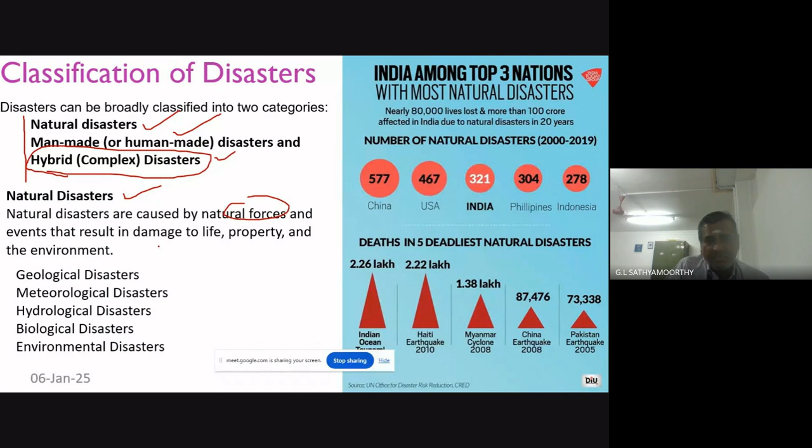Coming to natural disasters, which are caused by natural forces and events resulting in damage to life, property, and the environment, it can be classified into five types: geological disorders, meteorological disorders, hydrological disorders, biological disorders - of course, recently we faced that - and environmental disorders.

One survey says that India is among the top three nations with the most natural disasters, with nearly 80,000 lives lost and more than 100 crore affected in India due to natural disasters in 20 years. This figure is so alarming - India faced almost 321 disasters during the period from 2000 to 2019. This shows the death rates in the five deadliest natural disasters, showing how vulnerable we are when a disaster happens.

Coming to geological disasters, we know earthquake, which is the sudden shaking of the ground caused by the movement of tectonic plates. Then volcanic eruption, the eruption of molten lava, ash, and gases from a volcano. Sometimes landslide - recently we witnessed the Wayanad landslide, the downward movement of rock, soil, and debris due to gravity, often triggered by heavy rainfall or earthquake. Tsunamis - our response is mentioned in the year 2004 when we witnessed one, and Kumaraguru was also part of the combating activities. These are oceanic waves generated by underwater earthquakes or volcanic eruptions that can flood coastal areas.

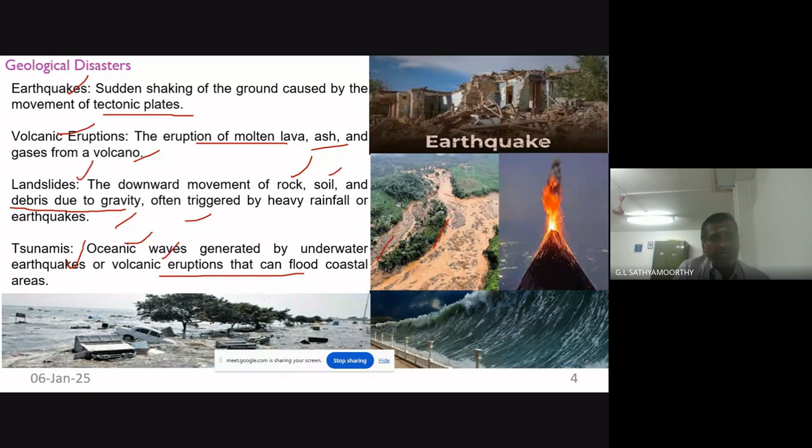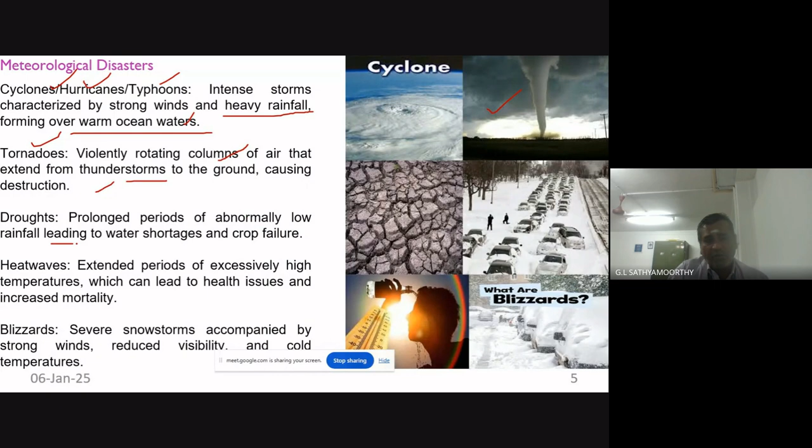These are all pictures showing natural earthquakes, especially from geological disorders. Coming to meteorological disorders - cyclone, floods, hurricane, typhoon all come under meteorological disorder because of strong winds and heavy rainfall, maybe over ocean waters. That is meteorology. Again, tornadoes are violently rotating columns of air that can extend from thunderstorm to ground, causing destruction. And droughts are prolonged periods of abnormally low rainfall leading to water shortages and crop failure.

Nowadays we are not facing the drought, but we are facing heavy downpour and heavy drought. Both are happening in our area because of climate change, as rightly told by our principal. Again, heat waves, extended periods of excessively high temperature, which can lead to health issues and maybe increased mortality.

Again, blizzards, severe snowstorms. Of course we are in Ooty and all, we can see in recent news that Urai Pani is possible in Ooty. Like that, some areas of North India are facing this type of blizzards because of snowstorms, which will cause reduced visibility and cold temperature. Because of that, people will suffer. Sometimes this type of thing may happen in disasters, especially meteorological disasters.

Coming on to hydrological disasters, the floods, which usually happen when rivers overflow during the rainy season, normally on dry land. Of course we are facing issues in the Tanjore districts and recently we faced it even in Tirunelveli, caused by heavy rainfall, again snowmelt. Of course this is not in South India, this could be in North India. Sometimes dam failure or dam opening, deliberate dam opening, all of which we recently witnessed.

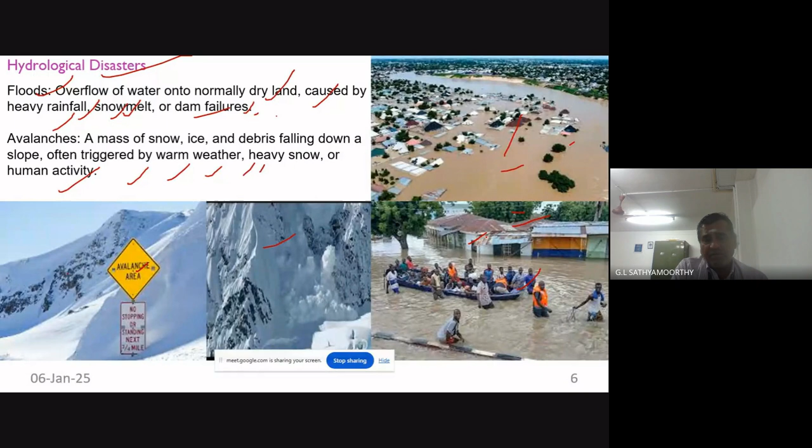Again, avalanches, a mass of snow or ice debris falling down a slope, often triggered by warm weather, heavy snow, or human activity. Sometimes those who are climbing snow mountains face this type of problem while climbing. These are all disasters, these pictures showing the ill effects of floods whenever dams are opened without giving notice or warning. Again, coming on to biological disasters, of course recently we faced the pandemic, and pandemics and plagues, widespread outbreaks of infectious disease.

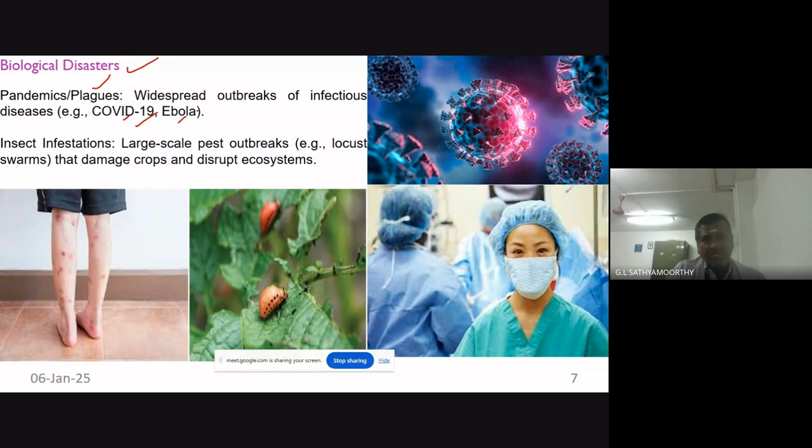Again, COVID-19, Ebola disease. We were almost 2.5 years in lockdown because of the pandemic. Again, sometimes insect infestations, sometimes insect bites, which may cause outbreaks of diseases, maybe among humans, this type of disease may come for humans.

Sometimes it may go and eat the leaf or the crop. In such a way this will also damage crops and disturb the ecosystem. We all know that we had our personal protective equipment and then we moved during the time of Corona. This is one of the biological disasters we recently witnessed.

Again, coming on to environmental disasters. Naturally many environmental disasters are happening around the world, especially forest fires, which cannot be controlled, which will spread across all the vegetation, often caused by dry conditions. Whenever two wooden blocks have friction, sometimes this type of wildfire will pop up. Again, sometimes lightning also will contribute to that.

Sometimes human activity, in the Amazon, of course, they are planning roads near the Amazon jungle. Because of that, sometimes people going there use fire-like things for the benefit of cooking and all. In that leap, sometimes this type of human activity causes environmental disaster to pop up.

Again, coming on to pollution, we deliberately pollute air, water, and soil. Because of that, many contaminations are happening. Because of the contaminations, we become the host in spreading diseases. That is what is happening in environmental disasters. So that is why it is our bounden duty to say that we have to not pollute air, water, and soil.

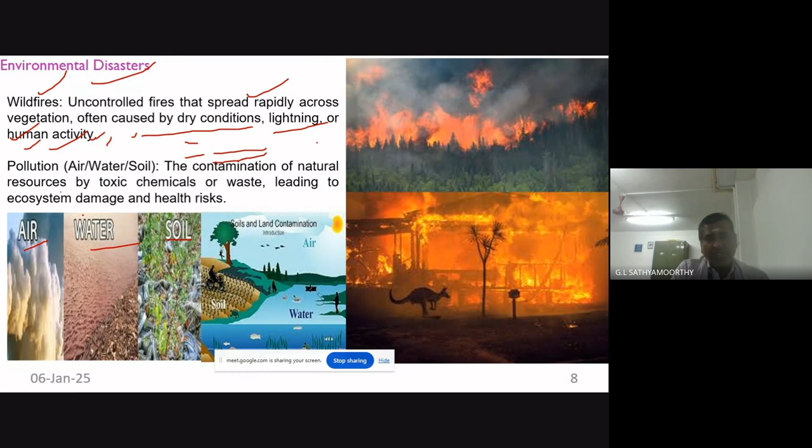Again, coming on to various man-made disasters, which are caused by human actions or negligence. Sometimes negligence also, often involving the release of harmful substances, maybe into the air, or destruction of infrastructure. So again, this can be grouped into 5.

Number 1, technological disasters, environmental degradation. Third one, armed conflict and war. You see nowadays Russia is making attacks on Ukraine's power grid, which may lead to catastrophic nuclear accidents. Again, technological failures, which is one of the, maybe power line failures, all those.

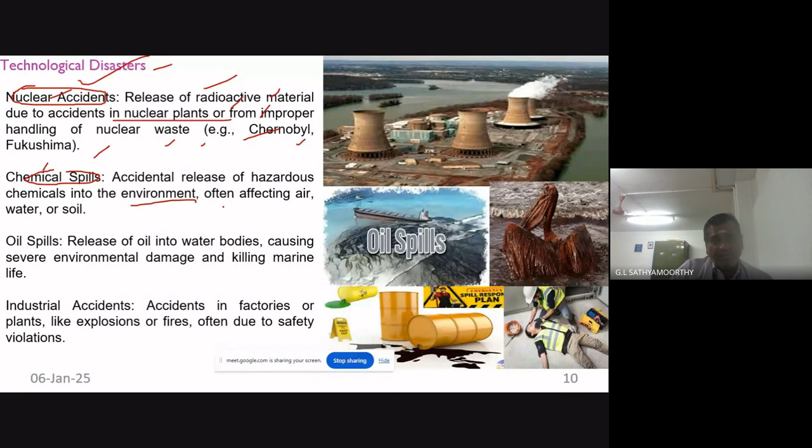Again, chemical spills. Recently in Andhra Pradesh we have seen some chemical spills - accidental release of hazardous chemicals into the environment, affecting air, water, and soil.

Again, oil spills - we recently witnessed this in Tamil Nadu coastal areas, especially near Chennai. Release of oil into water bodies. When oil ships face problems in the sea, oil spills may happen, causing severe environmental damage, including killing of marine life. You see this species living in the oil-linked area.

Again, industrial accidents - sudden accidents in factories or plants, like explosions or fires, are often due to safety violations. Sometimes accidents happen because of negligence of people in industry. These are all called technological disasters, especially man-made disasters.

Coming to environmental degradation - deforestation is one of the serious issues caused by people. Even in the Amazon, people are building roads through the forest. That's why nowadays we are encouraging afforestation programs - if one tree is removed, ten saplings must be planted, supporting afforestation and avoiding deforestation.

Again, soil erosion - this is topsoil removal happening because of leaching out during rain. Sometimes this makes land less productive and vulnerable to floods. All these are happening because of man-made actions.

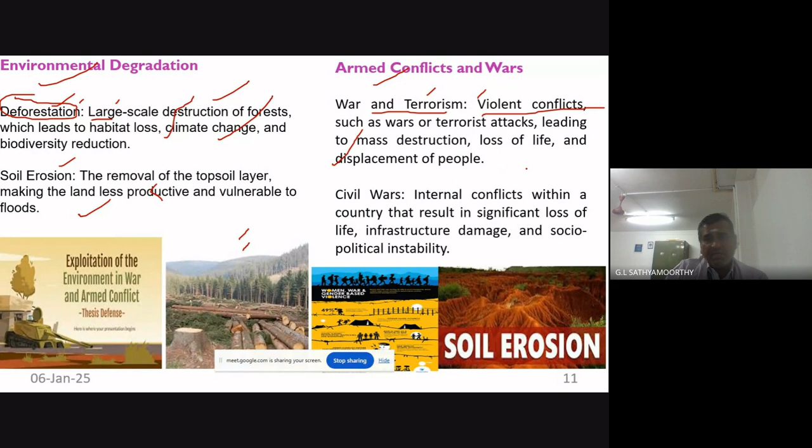Again, armed conflict and wars - war and terrorism, because many wars are happening around the world, violent conflicts such as war and terrorist attacks lead to mass destruction, loss of life, and displacement of people. You see, whenever Bangladesh has some problem, we face some sort of problem in the neighboring states and districts.

People say sometimes migration from Bangladesh to India happens because the borders are very close by. Similarly, whenever Burma is under problem, people migrate to India. Likewise, with war and terrorism, we see many Tamil Eelam people coming from Sri Lanka, maybe to India. This not only causes internal strife but puts nearby countries under stress too.

Again, civil wars, especially internal conflicts - we know Somalia, which is facing severe drought and economic crisis because of internal conflict. Nowadays gender-based violence is also a problem - you see women facing war-like conditions. These things are also created, causing destruction because of man-made actions.

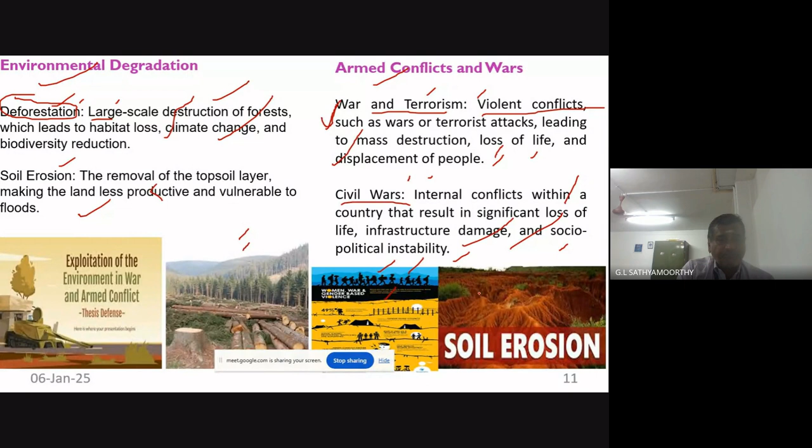Again, cybercrimes are increasing nowadays. Even the Government of India, before we make a phone call, gives awareness messages - don't be a victim of cybercrime. People are nowadays talking about 'digital arrest' - there is no such arrest available in India, but people talk about digital arrest and put victims inside a room by telling them this. We have to know and avoid all these things.

Again, you see nowadays - earlier knowledge was power, now data is power. Whenever data gets leaked to a nearby organization, we as an organization suffer. That is very important. Important data should be protected - that is why nowadays computer engineers come up with coding languages.

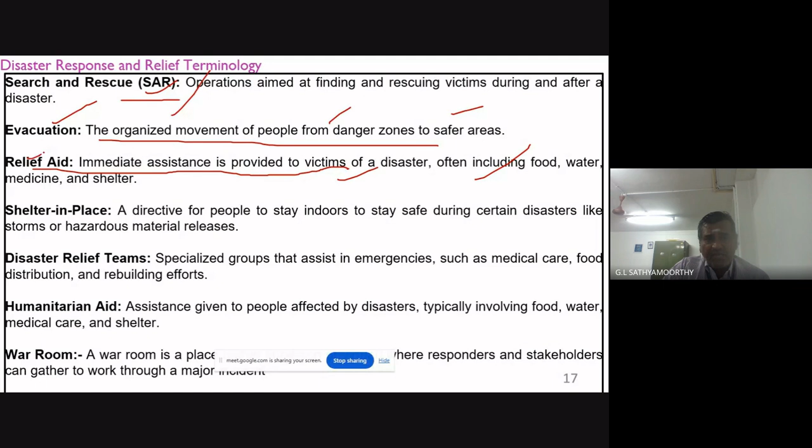At that time, money alone will not suffice, because even when Tirunelveli was affected, people were asking for drinking water, since water was available everywhere but not good for drinking. That is why we arranged bottled water.

Again, shelter is very important, because when everything is lost, people need to be put up in a nice place. Shelter in place is a directive for people to stay indoors and stay safe during disaster, because their morale will be completely lost, as they lost their life, their near and dear ones, and also their finances. At that time, they must be kept at the highest morale. That is very important.

Again, disaster relief team, a specialized group, is very important. This specialized group can move into the disaster area and provide support, including medical care, food distribution, and all those things.

Again, humanitarian aid is assistance given to people affected by disaster, typically involving food, water, medical care, and all those things.

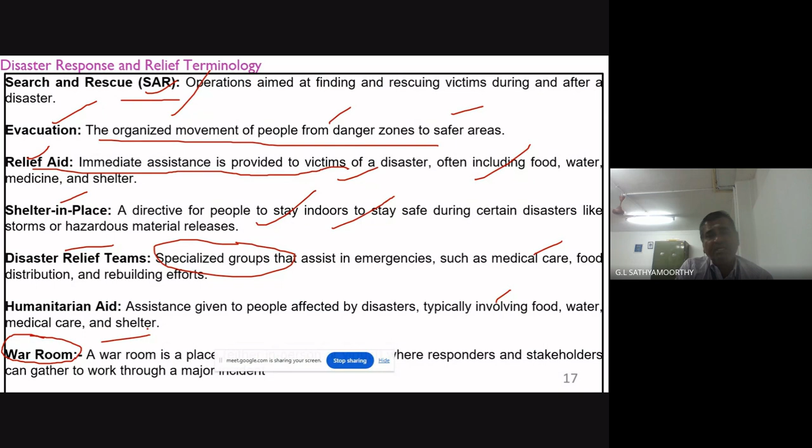War room, that is very important. A war room is a place where decisions are taken. Even during the pandemic, we established a war room in our state capital. Whenever disasters happen, the war room plays a major role, where people can give and get communication and information. High command, along with officials, can sit and take the right decision in order to mitigate the disaster. That is what the war room does.

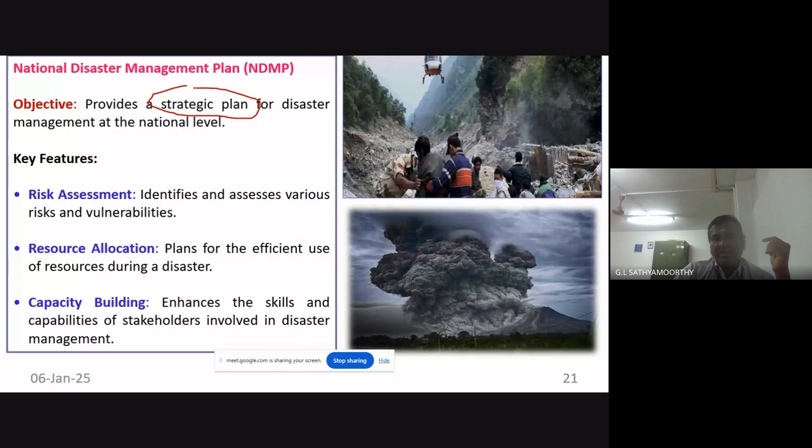Again, the National Disaster Management Plan, NDMP, is a strategic plan. Whenever something happens—a fire outbreak, a flood at the national level—it gives the framework for what all things need to be done: risk assessment, identifying and assessing the various risks and vulnerabilities. Nowadays whenever we hear about a flood, we can understand what sort of problem may happen.

Again, resource allocation—plans for efficient use of resources during disaster. Especially during disasters, people face issues with drinking water, food, shelter; all this has to be properly managed. That is why it gives a comprehensive plan for how to utilize resources.

Again, capacity building—during a disaster many people join hands, but they may not be trained. That is why we need regular trained people to enhance the skills and capability of stakeholders involved. That is why there are state teams and district teams available for immediate response.

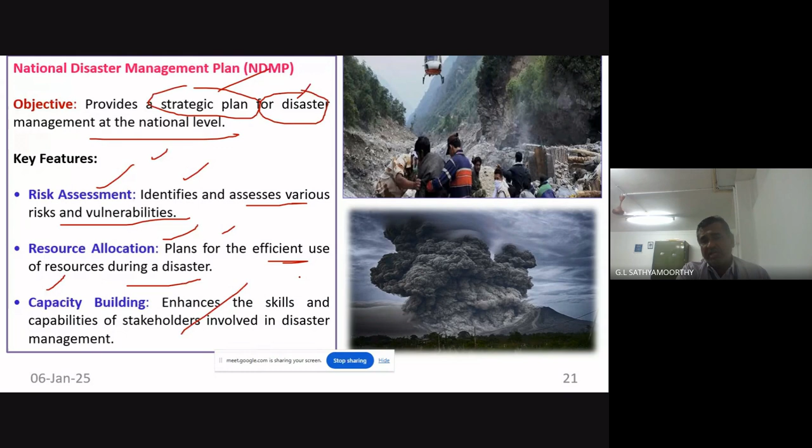Even in our institutions, through NSS volunteers, whenever there is a requirement to support this type of natural or man-made disaster, many students are ready. They are given training and then taken to the real ground for their activity. In such a way, we can combat or mitigate some of the disasters.

Again, coming to the Environment Protection Act, which talks about the legal framework on environmental conservation, especially supporting disaster risk reduction. Pollution control—regulations to prevent pollution which can mitigate certain types of disaster.

Example, air quality standards—Delhi is under severe problems. Nowadays many cities are under problems because of smog, thunder, storms, or cold climate. Whenever air quality standards go beyond limits in Delhi, we find the index, which is supposed to be 50, reaching 300. That is why it's highly vulnerable.

Like that, by means of having certain indications, you can avoid certain problems by imposing strict regulations. That is why water quality regulation for drinking water—all these standards need to be there.

Then it can be bottled and sold. Like that, some regulations exist - again, waste management rules. How do we do the waste management? How do we do composting? All those things are available. Government of India is supporting that.

Again, chemical safety regulations - how nuclear waste can be transported, how it can be stored, all those things are given. Again, water and noise pollution is also sometimes going to be havoc, especially in urban areas. For that also we have the pollution control board regulations to mitigate.

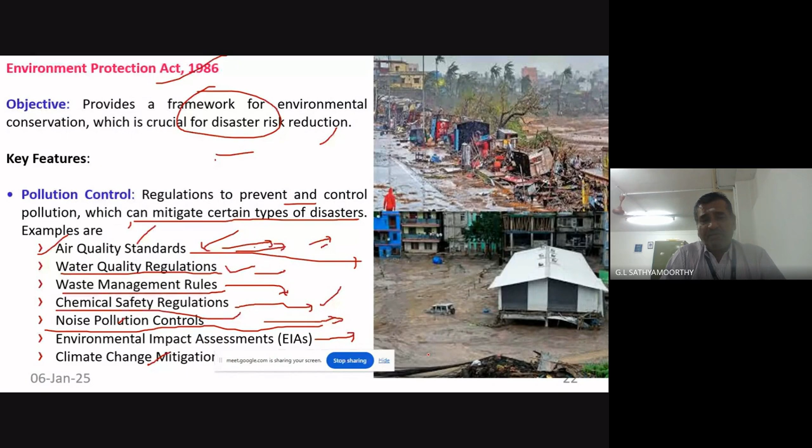In Madras nowadays, we can see people obviously putting their cars in the sides of high-rise bridges. The idea is they understand where the water may come and damage their vehicle. That is why they prepare themselves and stay in line without affecting the regular traffic - they are parking their vehicles on high-rise bridges.

Like that, we can do risk mapping, and then we can identify vulnerable areas so that we can evacuate people, and we can also save some economic loss from that.

Again, preparedness plans - whenever more people are getting affected, we can prepare some strategies, and then we can make people comfortably evacuate from that area and arrange food, shelter, everything for them. That is called a preparedness plan.

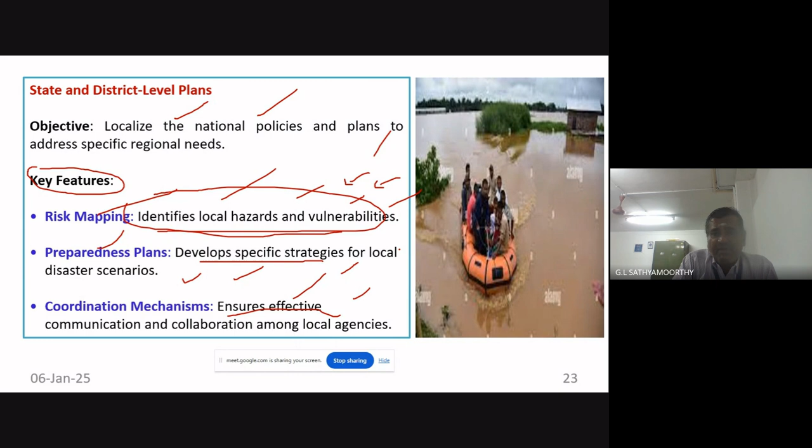Again, building construction code - we should not violate the NBC norms. That is what our director touched upon in his address, the importance of constructing high quality buildings, high quality resilient structures.

That is very important, because whenever we compromise on building standards, we are definitely going to invite danger. That is why the seismic, wind, all those things we have to take into consideration. We have to go for it.

Again, compliance - sometimes regular inspection and enforcement. You see, in Coimbatore, many buildings which are not worthwhile to live for human beings are destructed, and then we construct new buildings for them. Especially in Ukkadam area, we have seen one building that went down into the soil.

So what we did, sir - immediately we said that those areas are not suitable for people to live, and we evacuated them, and then we constructed new buildings in the area near Kurumbapalayam and other Saravanampatti area. Of course, people were evacuated.

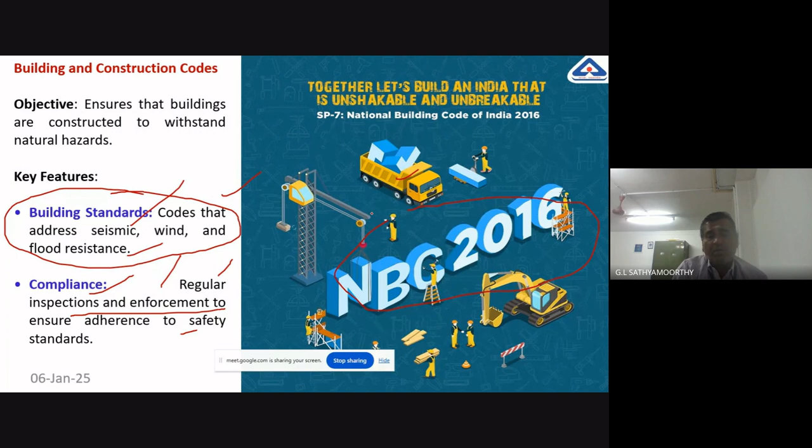Regular inspection and enforcement - so many slum clearance board buildings are not suitable for living. Now they constructed new buildings for the benefit of slum clearance, slum dwelling people. Now they evacuated. Like that, we can do.

Again, coming on to how this can be taken to higher education institutions and schools - that is curriculum integration. You see, in all our curriculum, this particular thing is given as one of the important aspects. Maybe in open elective, for masters we are given it as an audit course. Especially everyone should do it.

Without that, they should not go outside. Like that, we can put it into curriculum, and then we can give an insight for students on how best they can technically manage any disaster whenever it happens.

Again, schools need education safety plans. Recently I witnessed a video on social media where an unknown person approaches a student and offers chocolate, and the students vehemently refuse to take it from the unknown person. Like that, passcodes can be introduced for when parents are not coming but somebody else is sent to pick up the children, so students don't go with unknown persons. Some such measures can be done especially in schools, preparing them because school children may be vulnerable to this type of man-made disaster. We can avoid that.

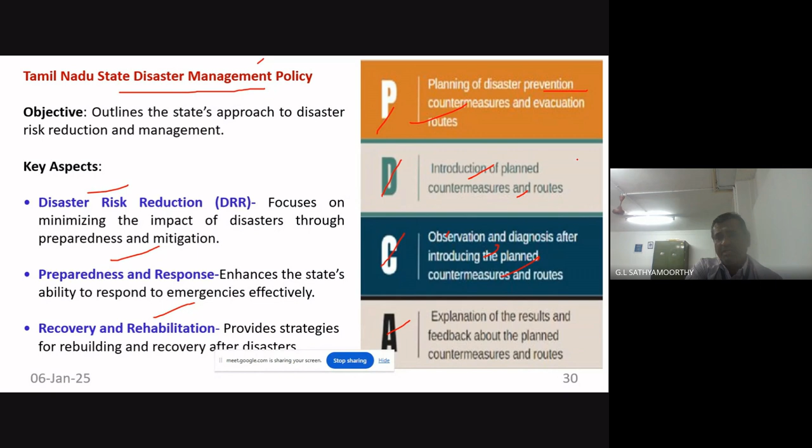Again, Tamil Nadu State Disaster Management Policy includes a War Room. Tamil Nadu nowadays sets up a War Room even for natural or man-made disasters, because they immediately announce emergency telephone lines, hotlines, and war room connections. We witnessed this during the pandemic and for the Chennai floods, where the CM set up a war room.

This provides the detail for managing disasters in the state: risk assessment, identifying risks, preparing the plan, and working with the people. Resource management involves planning what resources are available and sending them accordingly. That is where I personally believe in resource management and coordination.

As rightly told by our correspondent, we can join hands in artificial intelligence and resource management. We can go for supply chain management where excess resources can be taken to needy people. Similarly, coordination can ensure that where more volunteers are available, they can be sent to other areas through supply chain management. All these concepts can be brought in to support people affected by disaster, especially during the time of disaster, when we can join hands.

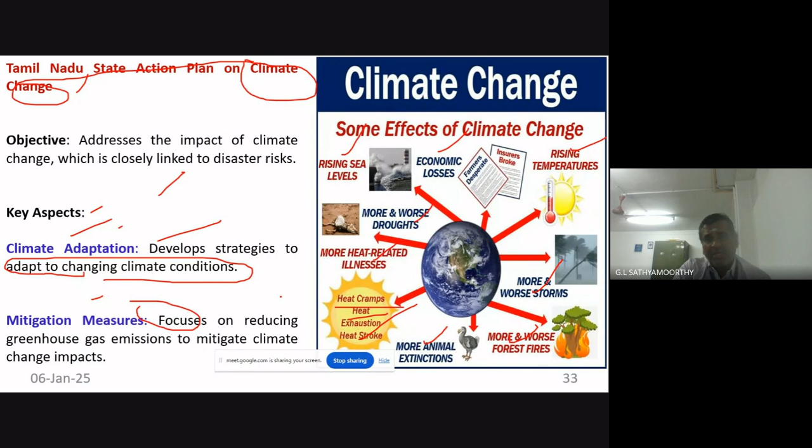Again, in Tamil Nadu state, we have the early warning system, especially for floods. Last time our Chief Minister went to Delhi and requested Amit Shah ji, because the early warning systems were failing. They said a good system should be in place to evacuate people from the affected areas. That is why nowadays the Government of India is pouring money into making early warning systems available in all flood-affected or disaster-affected areas.

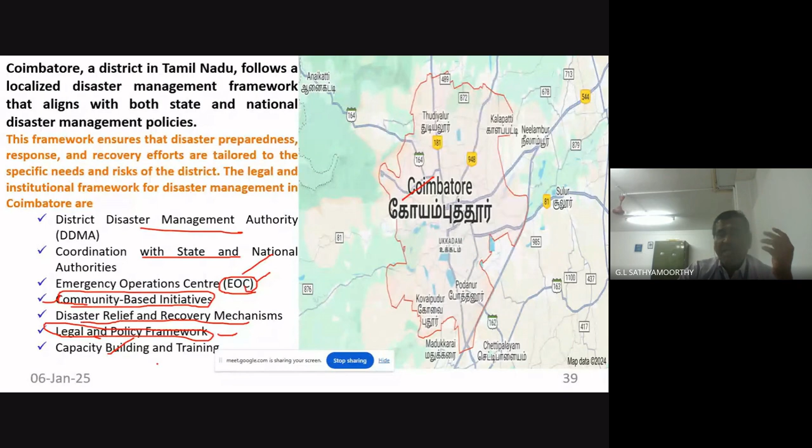We can do some sort of national level thing, again implement at local level, legal and policy framework. Sir, sometimes legal offense should not be there while we are doing the work. Again, capacity building and training - every village, people can be trained to respond to immediate disaster requirements.

All those things, again district disaster management authority - they give the chairperson, maybe the district collector or district magistrate, including senior officials from government and local bodies. Again disaster planning, coordination, all those things they will be doing at district level. That is why I told you this district disaster management is not only by local people, from national level to state level to local level, or district level to state level to national level. Whatever good plans, whatever good strategies are available, that can be taken and we can go for implementation. Even district level plans can be adopted at national level.

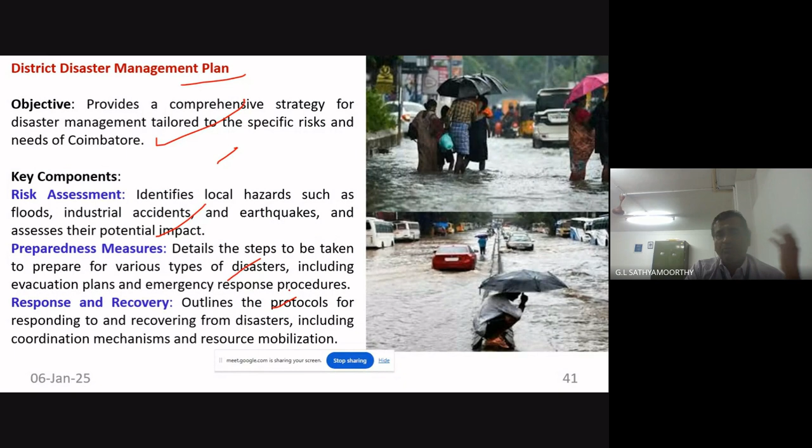Again, a management plan is a comprehensive strategy for disaster management. Especially whenever Coimbatore gets heavy downpour, we tell people they should not go to some of the bridges which are under low-lying areas. Like that, now we have mapped many areas and we are giving awareness to the people. Again preparedness, response, recovery - all those things you can do well in advance, and we can tell the people not to become the victim of it.

Again mock drills are very, very important. Sometimes the state disaster management authority will come and conduct some sort of mock drill. During the time of preparedness, even for fire and safety, the fire safety officials are ready to give training at all the colleges. Just when we pay 1500 rupees for them, they will come and give training during the time of outbreak of fire - how we are not supposed to panic, how do we mitigate those fires. Everything we can get just by paying a 1500 rupee fee for them. One day they will come along with their own force, they will teach us and even give some hands-on training. Like that, we can go for mock drills in our places by creating a team, and then we can go for supporting emergency operations.

Whenever EOC, even mobile centers are nowadays available, which have a radar and everything.

Communication will not disturb because of any other mode of failures. That is very important. It acts as a central hub for managing disaster response efforts, so emergency operations can be immediately done. Even with mobile technology nowadays, we can put the emergency operation centers on wheels, so we can take it anywhere away from the disaster area, make it stand, and then communicate.

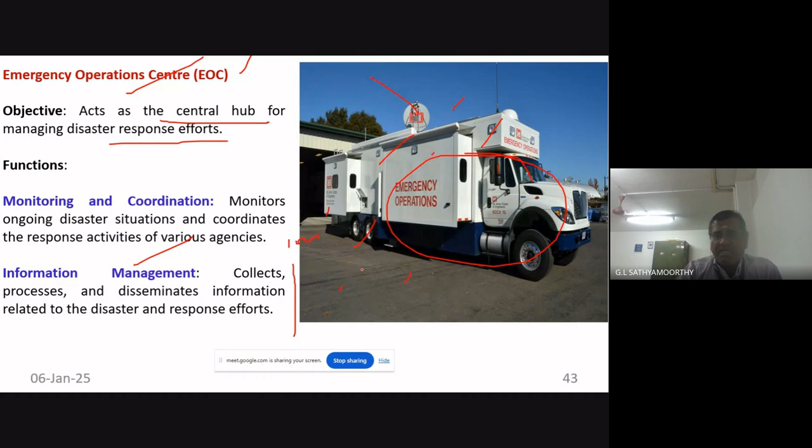Again, this acts as information management. We should be collecting information both ways, from the disaster affected areas as well as other areas, so that they can give guidance. Suppose, for example, 100,000 relief vehicles are coming in, where does it have to go? When we contact the emergency operations centre, they can tell us, please go and distribute over there. Like that, we can manage it.

Again, community-based initiatives, maybe awareness campaigns. We can do plenty of awareness campaigns through structured programs, or informal and formal meetings. Again, training workshops can be given for people on how to act during the time of disaster, for local leaders and everyone. We can create at least 30 volunteers and prepare them for community-based initiatives. We can go for it.

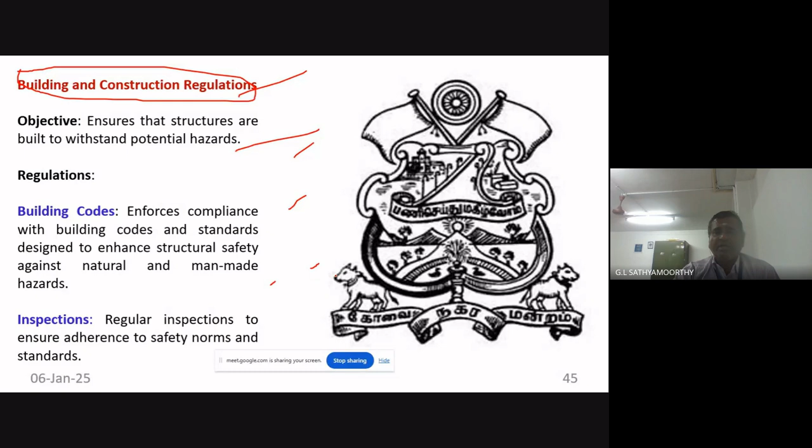Again, building and construction - nowadays these municipal laws are becoming too stringent. Even LPA is becoming too stringent. When we violate the norms, they will not give the initial level approval for any building. When we make it regular for everything, people will not violate. There was a program where Madam Jayalalitha was there - those doing rainwater harvesting structures in their homes would be given a license to construct, or approval by the municipality. Like that, with some ordinance in place, we can see disasters are not happening.

That is why, sometimes, the relief and recovery mechanism - we have to rehabilitate the people by various means. Whenever COVID was there, our Kumaraguru Center was considered as one of the rehabilitation centers, where we gave yoga training, Kabasura Kudineer, and healthy food for the people to recover.

Like that, some sort of help we can do for the benefit of people affected by the disaster, whether small or big, because when disaster happens to other people, it is just news for us. When it happens to us, it is a massacre, or life damaging. That is why I always request everyone - put yourselves in the other man's shoes, and then see how best these types of rehabilitation can be given for the benefit of people who got affected.

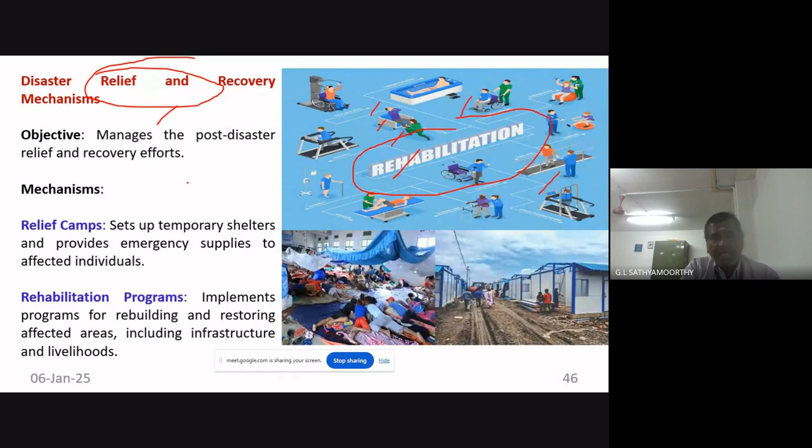When somebody gets affected by a disaster, their morale will be completely lost. They will be in fear, they will be in danger. All those things we have to remove from the minds of people by putting them at ease, and giving them a very good relief and recovery mechanism. That is what is very important.

Again, collaboration of non-governmental organizations and community work is very, very important, because they can join hands. Gandhiji says the best way to find yourself is to lose yourself in the service of others. So whenever we think, even an individual person can think 'I can do something' - that something is great when a disaster is happening. That is what Gandhiji is telling us - immerse ourselves in the benefit of others, in the service of others. That is what Mahatma Gandhi is telling.

This is the fulcrum for any community-based engagement - works with local communities, enhances preparedness. Again, what is the best thing? If I know something about disaster management, please go and tell others and try to be a part of that. That is what Gandhiji says - the best way to find yourself, especially during disaster, is immersing ourselves in the service of others. That is very, very important. That could be physical work, mental work, or distribution work - anything you can do, kindly join hands. That is what is very important.

Again, capacity building measures are very, very important. Without that, we cannot go to the real field and do surveys. That is why workshops and drills should be conducted on a regular basis. Educational programs should include all disaster management topics, and mock drills on disaster management effectiveness can be given. Thereby, we can go forward.

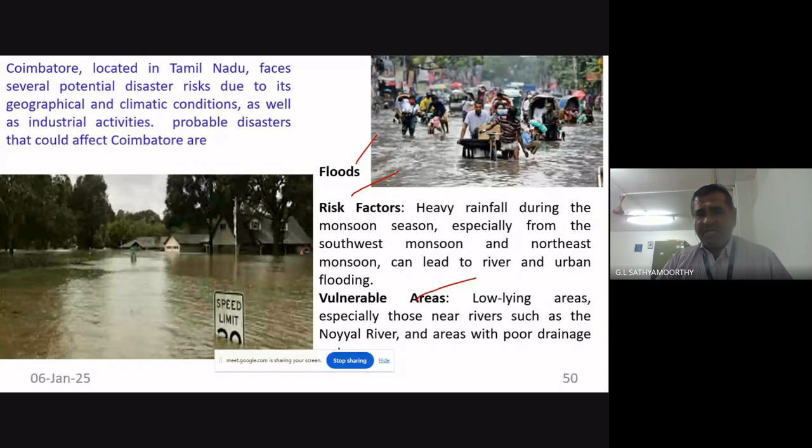Coimbatore is also vulnerable to floods, so low-lying areas are identified and avoided. It is also prone to drought and industrial accidents, since Coimbatore is one of the industrial cities, so we face some threat there too. That is why industrial areas are marked, and agriculture areas prone to drought are marked, and we tell farmers to adopt high or less water-resistant crops.

Coimbatore is also prone to earthquakes, and sometimes specific areas are identified for this. Hope my presentation is visible, madam.

Yes, visible, sir. Sometimes, even though Coimbatore does not directly have any coastal area, we also face problems because of cyclones. In the recent flood, Coimbatore may also get flooded, so we are making ourselves prepared for that.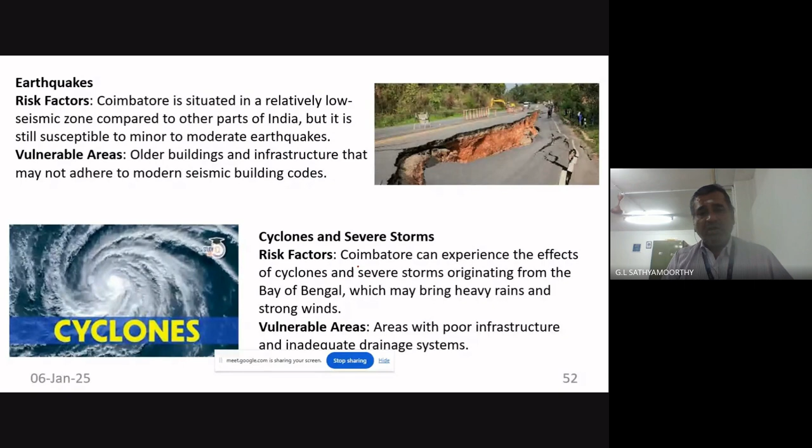Again, heat waves are one of the important things, because during summer, high temperature can lead to heat waves, affecting the health and well-being of Coimbatore people. Even Erode has this type of issue. In urban areas, we have to avoid lack of green spaces and poor ventilation.

Again, urban fires: sometimes high population density can lead to urban fire. Vulnerable areas include slums, densely populated areas, and industrial units. These areas should be marked, and we have to keep certain forces over there to avoid such incidents.

Maybe landslide as well. Some of Coimbatore's mountain district areas are vulnerable to landslides. So we have to go for afforestation programs in soil-eroded areas, or use geotextiles, which can strengthen those areas.

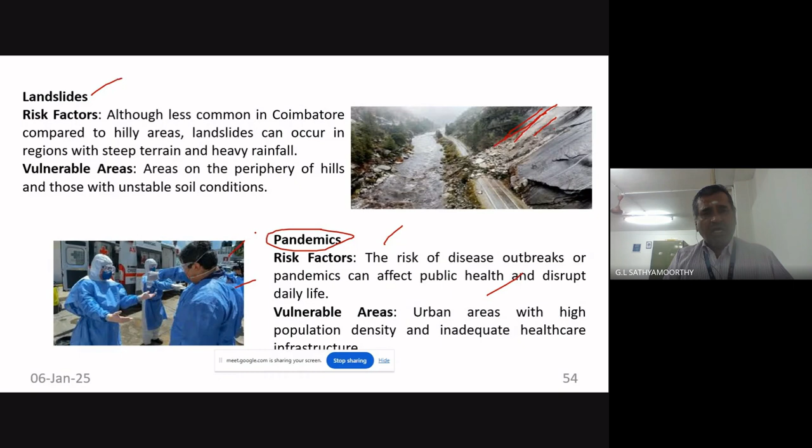Again, we face some sort of problem with pandemics. We have to ensure our medical infrastructure is made in such a way that people should not lose their life due to any communicable diseases.

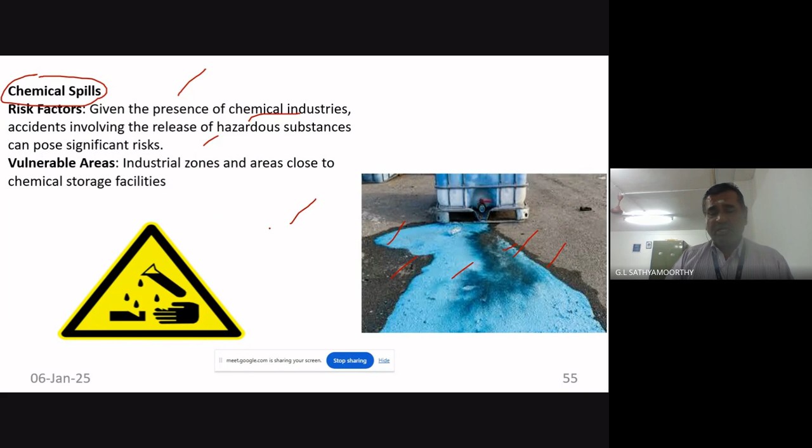Again, chemical spills sometimes may happen in Coimbatore because of industry. Whenever chemical spills happen, the best way to combat it is to use a wet mask and inhale through that, because the wetness will prohibit the movement of the chemical during inhalation. So use or dampen your handkerchief and use it like a mask. That is one of the suggestions given by authorities whenever we face incidents like the Andhra chemical spill.

Again, sir, the Prime Minister of India, Modi ji, has given a 10-point agenda for the benefit of disaster risk reduction, the DRR. He says all development sectors must imbibe this principle, because development should not be the only cause or aim, sir. They should always keep disaster risk as one of their important principles. That is the first point of the 10-point agenda.

Again, risk coverage must include all, so the risk coverage should not avoid small and medium enterprises. Risk means risk to everyone, so that coverage should be given to all.

Again, women's leadership and greater involvement should be central. Recently, one woman major was acknowledged by the Kerala government because within a short time, along with their troops, she made a temporary bridge for movement of people and goods. Like that, women should be made a part of any disaster management or risk management. That is what Modi ji is asking for, the third point. And the fourth one is to invest in risk mapping globally.

That is why risk mapping needs to be done in every area. If a flood comes, if heat waves come, we need to know which areas are getting affected, so we need to have risk mapping. If something happens, those area people need to be evacuated immediately.

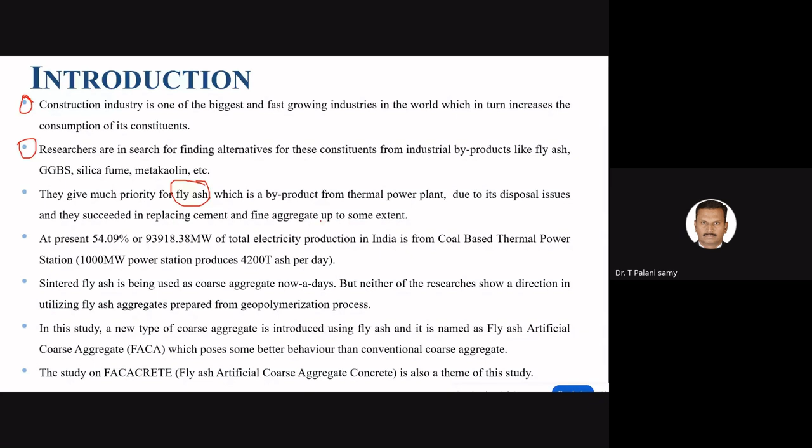Without products like GGBS, silica fume, metakaolin, we cannot achieve this kind of strength of material, and much priority is given to fly ash because it's a very good material—a byproduct from thermal power plants. Due to disposal issues, it is used to replace cement and fine aggregate to some extent. You can replace cement with fly ash, directly or indirectly—even during cement manufacturing, some cement can be replaced by fly ash.

On another side, at present, everyone is talking about energy consumption. The PM also mentioned goals around energy efficiency. For that, at present, 54.09%, or 93,918.38 megawatts, of total electricity production in India comes from coal-based thermal power plants.

Coal-based thermal power station. For example, a 1000 megawatt power station produces 4200 tons of ash per day. This is our power consumption and production. This is produced from industrial waste products, byproducts called fly ash. So this much quantity of ash is produced every day against this much power. That is the scenario, and this is another side issue.

You may ask, sir, why is this older technology, why are you bringing it here now? Correct question. The sintered fly ash is being used as coarse aggregate nowadays - that possibility is there. Sintered fly ash aggregate as a coarse aggregate is another area of research.

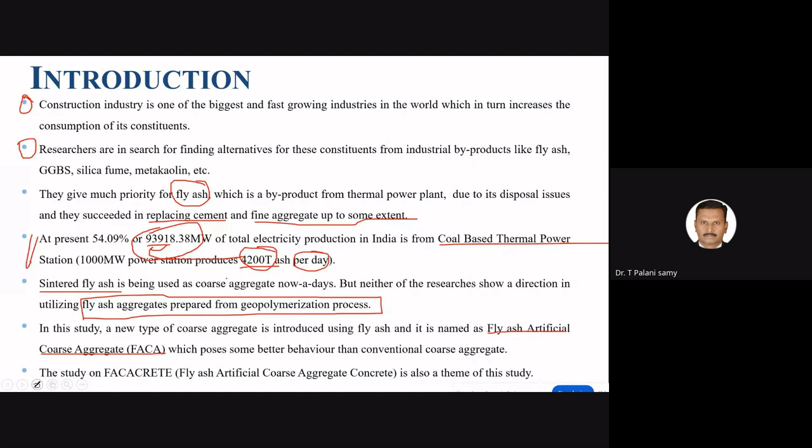Now this is the current scenario - that production, the fly ash production in million tons per year, with respect to different countries on the x-axis and fly ash production in million tons per year on the y-axis. For example, India is the highest, around 132 million tons per year, then China, then USA, Germany, and so on. So the graph shows it like this.

So now we have this much opportunity to utilize this kind of fly ash in an effective manner, and we are also the responsible persons to reduce fly ash consumption and reduce the production of damages to the earth.

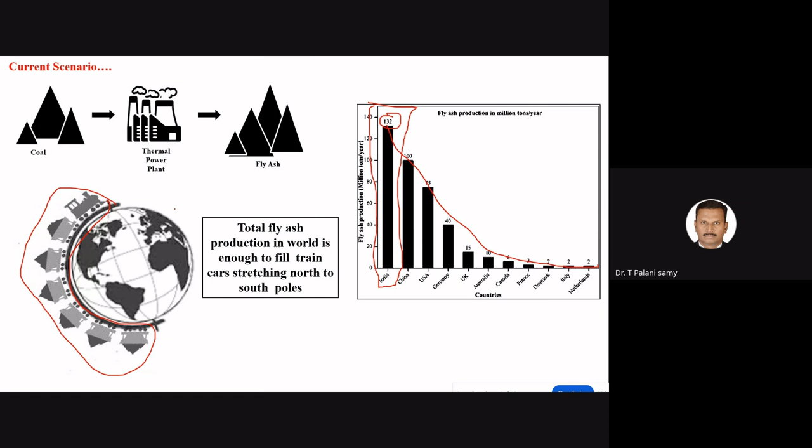This is some graphical way - the total fly ash production in the world is enough to fill train cars stretching from the north to south poles. That much fly ash. This is just a graphic representation, not my data, showing what the scenario is about fly ash. Even we have a huge demand for fly ash at present. Most people are aware of that.

So I want to go a little deeper into geopolymer. Geopolymers are synthetic mineral products that combine properties of polymers, ceramics, and cements, which can be synthesized by condensation reactions of the geopolymeric precursor. For example, the technology needs a source material and an alkaline solution.

A lot of development is happening in geopolymer. One is that a source material is needed, and an alkaline material is required. Source materials include kaolinite, clay, fly ash, silica fume, rice husk ash, red mud, etc. Alkaline solutions include sodium hydroxide, potassium hydroxide, sodium silicate, and potassium silicate, etc.

Basically, for the binding purpose, for example, I can take one fly ash particle and another fly ash particle - these things cannot bond together unless some treatment is given. Either heat treatment, shock treatment, magnetic treatment, or any other chemical or physical treatment, whatever it may be. Unless that's done, it's just fly ash, it doesn't react with each other.

So fly ash has a rich amount of alumina and silica, as researchers tell us. This rich alumina and silica is more helpful for bonding with sodium hydroxide or potassium hydroxide, and sodium silicate or potassium silicate. So you can go for sodium hydroxide with sodium silicate, or potassium hydroxide with potassium silicate. You can also try other combinations. Among researchers, these are told to be good combinations to get a very good geopolymer matrix - that's why we're using these two combinations. In addition, you can use any other combinations.

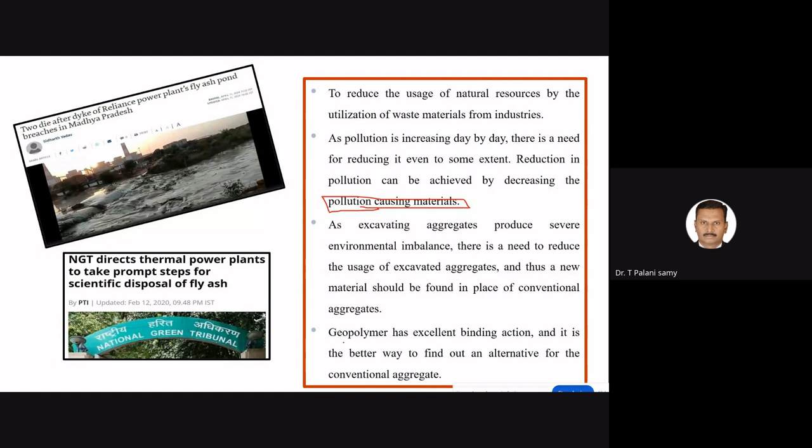So what is a good solution? Geopolymer has excellent binding action, and it's a better way to find an alternative for conventional aggregates. So these are the materials.

The fly ash was obtained from the Mettur thermal power plant - all of you know about that. It was obtained at the rate of 800 per ton, that was 5 to 6 years back. Now I don't know exactly.

Then the alkaline solution, sodium hydroxide - a lot of research is going on, I want to update on this. Sodium hydroxide of different molarity and different concentration is available in pellet form, powder form, and also pre-mixed kind of things.

At that time there was no such technology. Now a lot of technology is coming up. The sodium hydroxide was obtained in pellet form from the local market at the rate of ₹40 per kg. The NaOH pellets are converted into NaOH solution of the required molarity one day before preparing the alkaline solution.

These are the things nowadays - but that may have vanished, no need to wait one day before anymore. Nowadays, ready geopolymer is available, you can use it directly, no need to wait. You can get the powder form also, and all these things available in dry form.

I'm thinking to patent that, then bring it to market too. All the things mixed together, one product available - something I cannot remember exactly now - then in Bombay people are selling this product, so we can directly purchase in terms of kgs and tons.

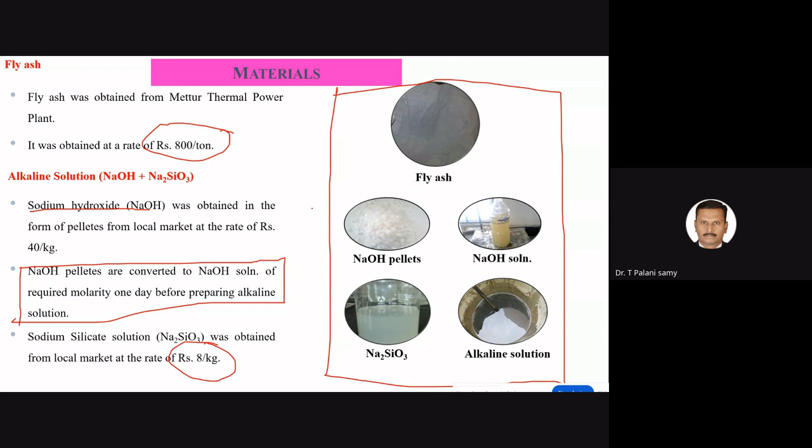We may be asked questions about who will purchase this kind of thing. Definitely they will purchase - nowadays no one is thinking about alternatives to coarse aggregate, or replacement of sand by quarry dust kind of things. Similarly, once the technology comes up, people accept it - that way everything is possible.

For concrete, suppose you developed some FACA - fly ash artificial coarse aggregate - how will it work in that concrete system? I can take an example. These are some methods available, Portland cement and all those things. Then FACA, that is called patent-registered material - we got the patent also. Fly ash artificial coarse aggregate, that is called FACA.

It's myself and Dr. Ajmal Mohammed. We filed the patent. Recently we got the patent also.

Now, in preparation, the sodium hydroxide solution to sodium silicate solution by mass to mass ratio was fixed at 0.5. A lot of research is going on in this area on how to fix that 0.5 mass to weight ratio, and you can even change it from 0 to 1. That is your wish. Then, according to the availability of material, you go for the pre-conformity test and the pre-trial, and we can fix that.

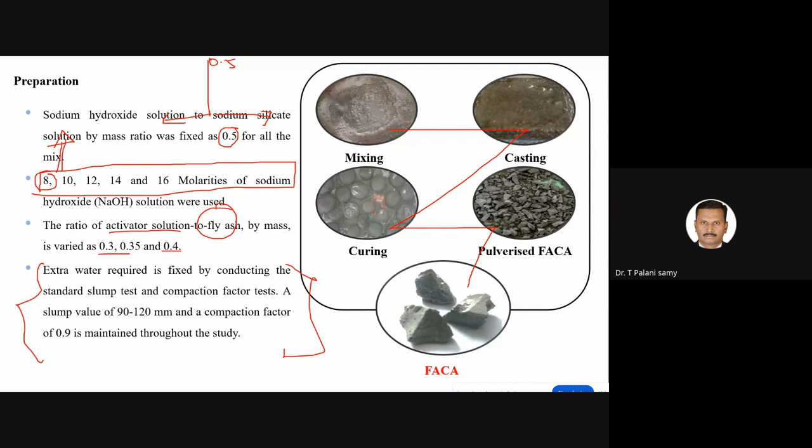So here it's mixing, then casting, then curing. Curing means just putting it in ambient temperature, that is curing. Then after that you can pulverize and get the FACA - this is the aggregate. You can see that the surfaces and all those things are very good, more or less equal to the conventional aggregate.

So these are the tables showing what we did in the trials. We developed and published a paper on how to express all this table data mathematically, and how to optimize it using different algorithms - genetic algorithm, ANN and all those things. We are using and changing the same things in different aspects.

Then for the mix proportions, totally 15 mixes of FACA were prepared and compared with crushed stone granite aggregate. The sodium hydroxide to sodium silicate solution by mass was fixed at 0.5 for all trial mixes. Then 8 to 16 molarity of sodium hydroxide (NaOH) was examined, and the ratio of activator solutions was 0.3, 0.35, 0.4.

These are the tables showing mix ID, NaOH molarity, alkaline solution to fly ash ratio, NaOH to Na2SiO3 ratio, quantity of NaOH, quantity of Na2SiO3, and quantity of fly ash used for this purpose, tabulated here. So any researchers can present these kinds of things and easily use them to develop their own mix proportions.

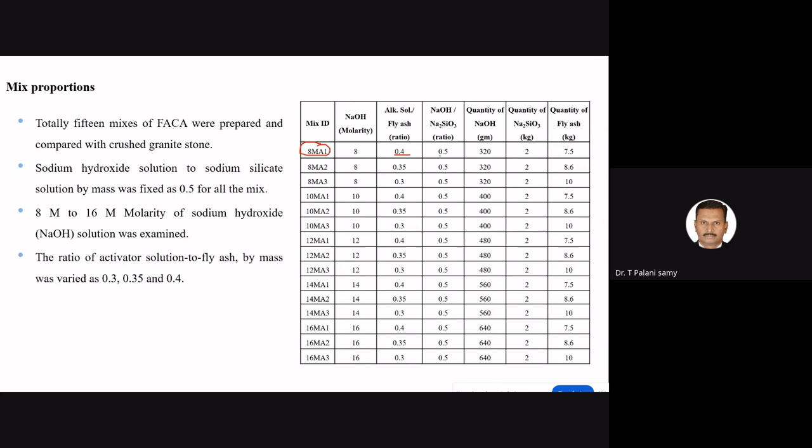Then these are the very interesting areas that we studied that time also. So you may be asked, sir, your product is good with respect to mechanical property. How can you say it gives us strength, and what is the sustainability? This may also be asked.

For this, we want to send the sample to XRF, that is X-ray fluorescence, XRF. The result gives oxide percentage, how much oxide is present inside this material. We found Na2O, SiO2, SO3, K2O, all these oxide compounds with respect to mass.

So here SiO2, the silica, is important, and sulfur trioxide and potassium. These are the important elements. How much we have found of each.

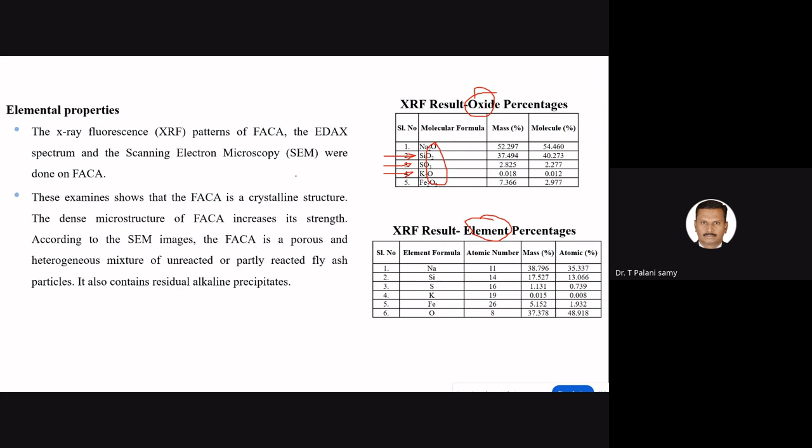This is the interesting graph, the elemental properties from energy dispersive X-ray analysis, EDAX. From this EDAX we can find the element composition, for example O, Na, C, Si, Al, Ca, Fe kind of things. We can also find the peak CPS per eV, then percentage of weight, atom percentage, and 1 sigma, K factor, Z factor, A factor, F factor kind of things.

So what we learn from here is that we have a rich quantity of silica, alumina, and ferric also. Silica gives more strength to the compound, and alumina is very helpful for bonding using the source material. Silica is also essential for the geopolymerization process. These are found in the aggregate also, and are very useful even when adding to concrete in the cementitious system. So a rich amount of alumina and silica is present.

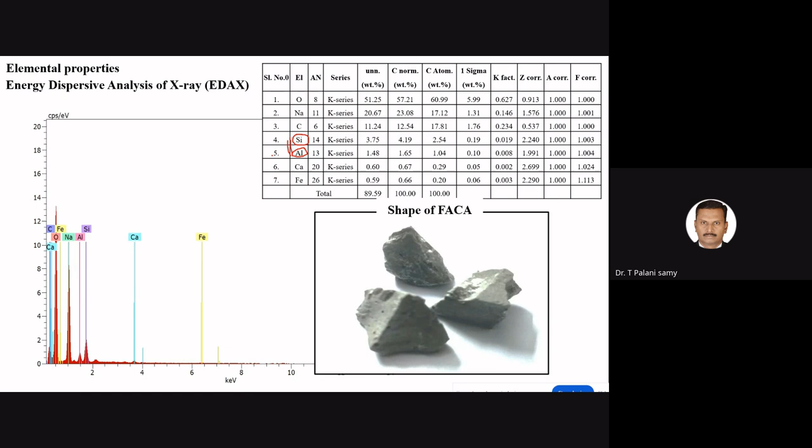But this also leads to some problems. A rich amount of silica can cause alkali-silica reaction, and excess silicates coming out creates some durability issues in the concrete system. That is another problem. Then, this is another interesting area, the scanning electron microscope.

Now a lot of technologies have been developed to characterize the material. This is one such technology, called the scanning electron microscope. Through this we can find the surface morphology of particular mixes or combinations, whatever it may be.

For example, how we can read this: suppose you supply any kind of light source. I can take this as one kind of wall and apply a light source to it through this. This is some kind of material, for example, the surface is very glassy in nature.

It may reflect like this. In case it's very rough in nature, the deflection angle may be something different. And what is the time travel from this, and what is the time travel to reflect this? From this we can know what kind of material is present here.

Similarly, here also, if any kind of metal is present, any shining surface, the light reflects automatically. Then if any voids or cavities are there, light cannot reflect. So it looks like, for example, this figure shows some voids kind of things, no reflection anywhere. You can see here also, these are some gaps.

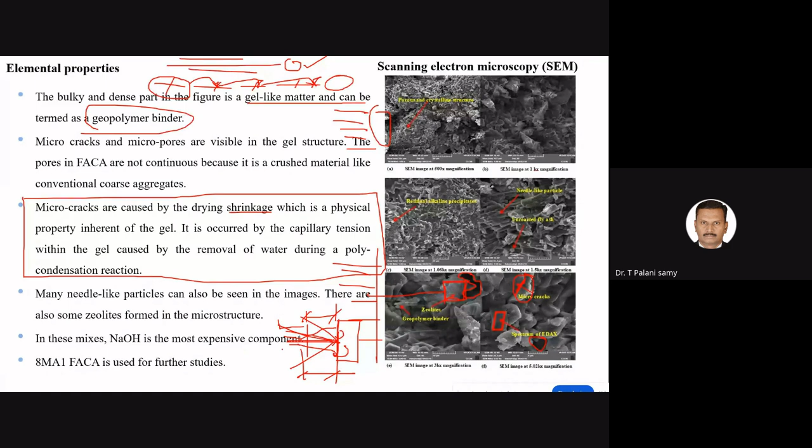In these mixes, NaOH is the most expensive compound. Then 8MA1 FACA is used for further studies. So now I'll consider the FACA aggregate. As I told you, there is the aggregate, and this is the concrete part. Clubbing together, I get that FACA aggregate.

So you may be asked questions. Suppose you've developed some FACA aggregates and you're ready to put them in the concrete system - how it behaves, how it changes the mechanical properties, and how this property of material is helpful for damage reduction. That kind of question you may be asked after this presentation, and I'll answer it. Now, M20, M25, M30 grades of both normal concrete and FACA concrete using FACA as the coarse aggregate were prepared and tested.

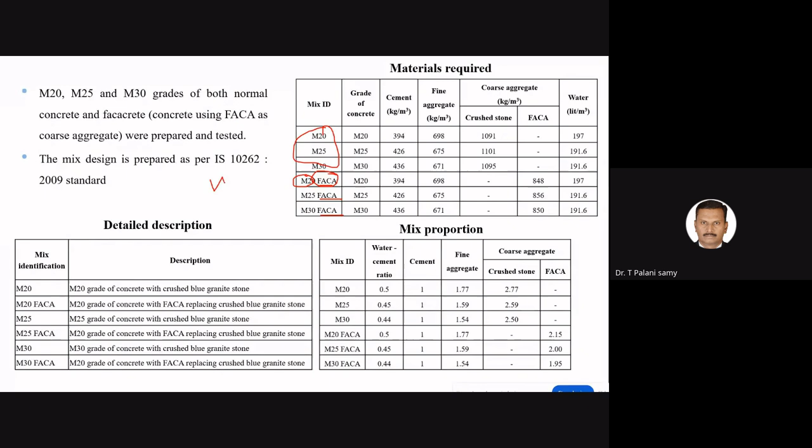The mix design is prepared as per IS 10262:2009 standards. These are some abbreviations like M20, M20 FACA, M25, and so on. Hereafter I'll use this kind of notation. I'll tell you one more thing about FACA concrete - don't worry about the quantity of water. But in case of cementitious concrete systems, we highly worry about the water-cement ratio. That is important.

These are the compressive strength results. I don't want to elaborate too much. What we observed is that this concrete strength is increasing, which is a good aspect. What is the reason? What is the mechanism behind this? That's what we want to take care of.

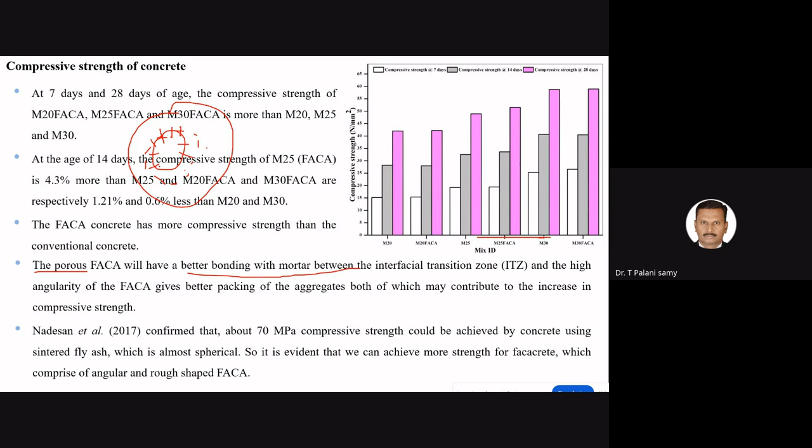The advantages of FACA I've given here now - FACA will have better bonding with the mortar, in the artificial interfacial transition zone (ITZ), and the high angularity of FACA gives better packing of the aggregate, both of which may contribute to the increase in compressive strength. So what we're claiming here is that the interfacial zone between the aggregate and bulk cement paste is good. Why? Because the aggregate is also reactive in nature, and the surrounding cement mortar is also reactive in nature. These two nicely react and there's a possibility of getting a very strong compound. Some drawbacks also exist, which I'll tell you later. Some researchers have also reported this kind of thing.

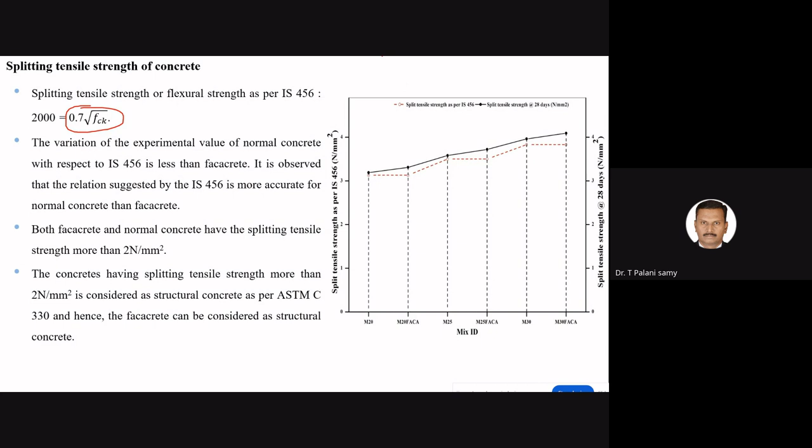Then the splitting tensile strength of the concrete, and the flexural strength as per IS 456-2000. Now we changed this formula for the split tensile strength of concrete, and the revised code needs to be published with these changes to splitting tensile strength. These are the graphs showing the splitting tensile strength for different mixes.

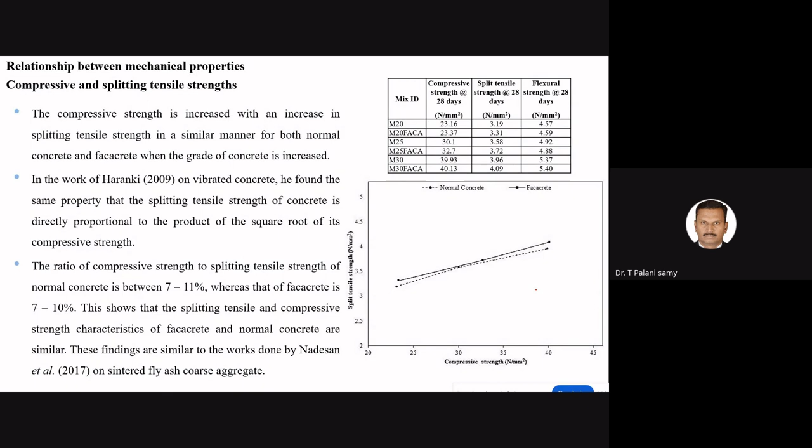For example, I can take the normal concrete: f of CT is equal to 0.9214 into f of CK to the 0.3964. R is nothing but the regression coefficient, R square 0.9964. Then for FACA-CRETE, f of CT is 0.9739 f of CK to the 0.387, R is equal to kind of things.

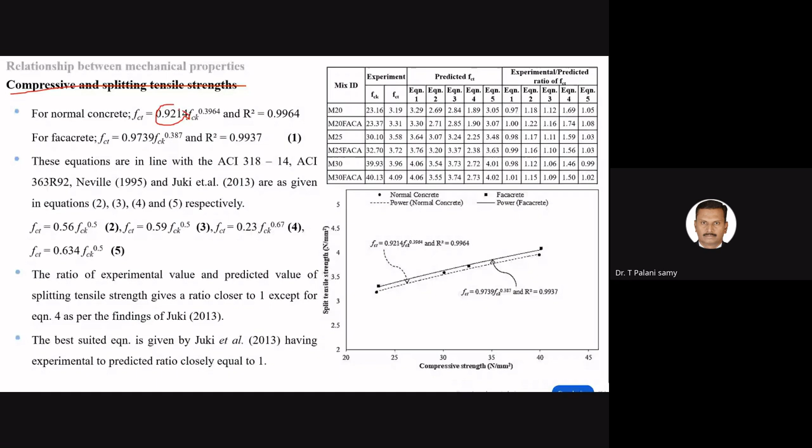So for example, this is the difference between conventional concrete and FACA-CRETE concrete. These are the factors.

From this equation, we can directly find the relationship between these concretes and all this we developed, and we compared it with the standard models also given by ACI 318-14, and Neville and Juki and others. So their findings and our findings are compared with each other, and our findings also more or less coincide with their findings.

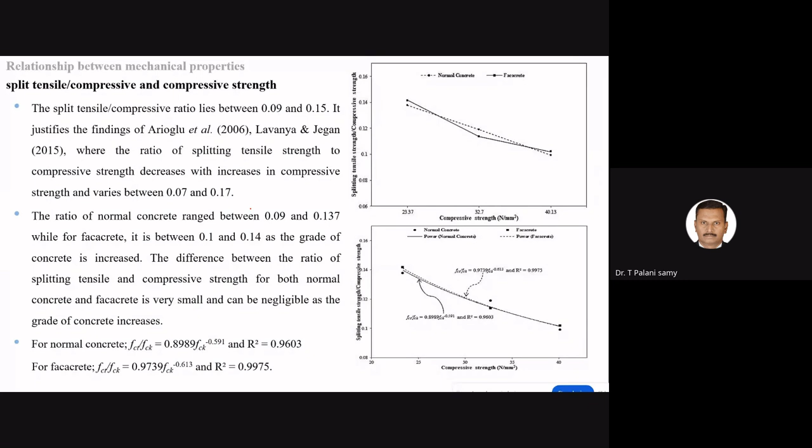That is, we evaluated our models. Then this is the split tensile and compressive strength relationship. So this is what relationship we developed, and we developed some model also.

Their compressive strength and flexural strength - here also you can use this kind of equations for your research also. Normal concrete and facacrete, we can develop that equation, and I can show here.

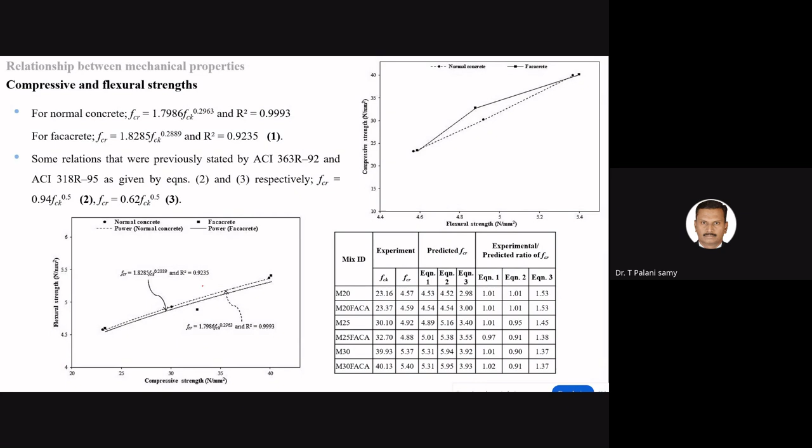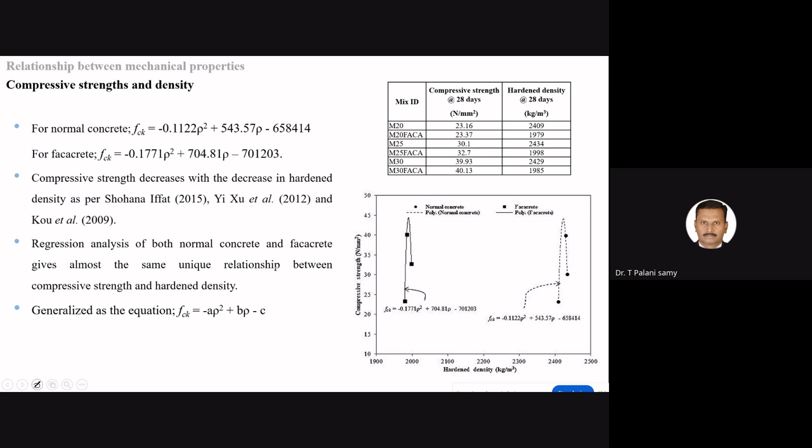Now another one is the material properties. You may ask what about suppose I'm ready to use the FACA - how is it applicable, how far it may be good for the structural properties. For that we get some cast specimens like a beam, column, joint, and so on, and how it behaves and all those things I am taking here.

Then stress and strain relationship of the concrete. On replacing the conventional coarse aggregate with FACA, the strain capacity and the elastic deformation capacity of the concrete is increased with the pre-failure zone.

From this, we can say this is a stress-strain plot from the FACA grade concrete. The stress is in the y direction, the strain is in the x direction. This F is nothing but ultimate.

So I can get the two graphs also, very nice graphs available. This slope I can get, I can also equivalently draw this curve like one kind of linear equation. So kind of the toughness ratio.

This is one of the parameters you can use for earthquake resistant structural design. The toughness ratio is nothing but the area under the curve ABC and FU into 0.15. Now a lot of research has been developed.

So different research is telling different definitions of the toughness ratio. Some people take it up to the yield point only, like this - so here, and after the yield, this portion only they will take. A lot of conflict is going on.

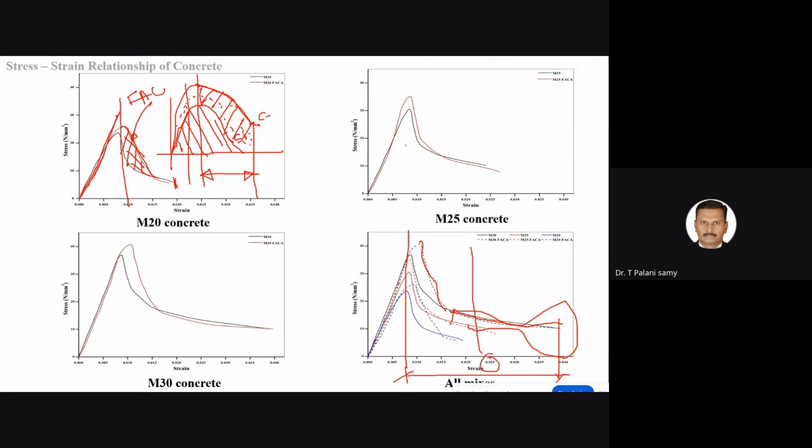So now we can extend this kind of research into fracture mechanics also - what are the fracture phases or fracture properties of FACA grade concrete? So our research can again start with this graph, it's a very interesting graph after this. So why not do that fatigue or fracture mechanics here, this is a very good observation. Why not go further with these kinds of things? Now students are working in this area - the replacement of conventional coarse aggregate by FACA affects the post-peak segment of the stress strain curve.

So what does this inference mean? The significant increase in the toughness ratio when FACA is used shows the effective contribution of FACAs to concrete toughness. This is related to the toughness.

Replacement of conventional coarse aggregate by FACA affects the post-peak segment of the stress-strain curve. This is an observation. You can get this kind of graph with fiber added, and without adding fiber also we can get this kind of shape of the curve. It's very helpful for earthquake resistant design.

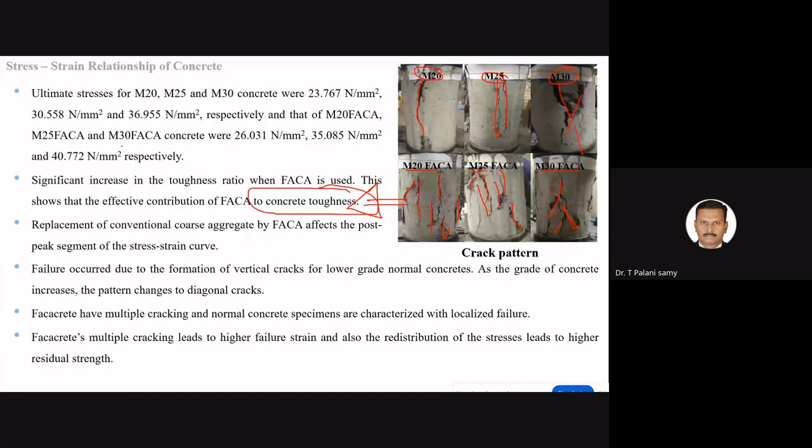The failure occurred due to formation of vertical cracks in lower grade normal concrete. As the grade of concrete increases, the pattern changes to diagonal cracks. This is a good observation - you can see multiple cracks. The FACA grade specimens have multiple cracking, while the normal concrete specimens were characterized by localized failure. FACA grade multiple cracking leads to higher failure strain, and redistribution of stresses leads to higher residual strength. These are some observations obtained from the stress-strain relations.

You can check with this whether our specimen is good on a quality basis. For that, 150 mm cubes were used to perform the UPV test. The ultrasonic pulse velocity of all mixes varies from 4.3 km per second to 4.65 km per second. The correlative concrete values we also mentioned.

Now we developed this test to another level - what is the frequency of the wave passing from one phase to another phase? With respect to the frequency, we analyze whether this concrete is good or bad. We are developing that kind of technology here.

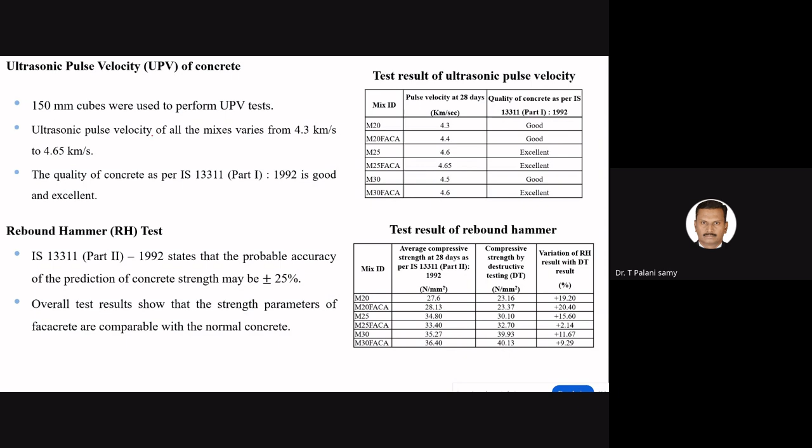Then the rebound hammer test, I've shown here - this is a simple test. Then slip bond behavior of the FACA grade - someone may ask, sir, I am ready to use this kind of material in the construction industry.

Suppose, what about the bond slip behavior of the FACA grade? How does the FACA grade relate to slip bond behavior? Why?

With respect to bonding between reinforcement and concrete, only then can most RC structures withstand loads. What is the bonding between the aggregate - sorry, bonding between the hydrated cement paste and the reinforcement - is very important for strength aspects.

For example, this is our specimen which we made in our laboratory. This is the standard one, IS 2770 part 1 - a 100 mm cube, locally called a lollipop specimen, 100 by 100 mm.

We have 6 mm diameter spiral wire, helical in shape. We insert the rod around 440 mm from the surface. The total length of the rod is 660 mm. Then we give some gap between the outer surface and the rod, around 10 mm.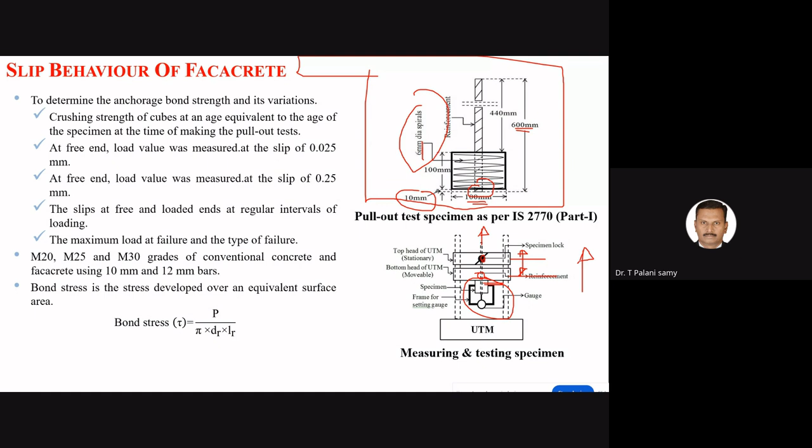It tends to move up for the reaction, and now this rod is pulled out from the concrete. How much force is required to pull it out from these things - that is called the pull-out test. This pull-out is related to the surrounding area around the concrete.

This surrounding area is important, so we measured here how much slip happened. The slip can be measured by means of a dial gauge, and the load is measured by means of a load cell, or otherwise you can use a direct UTM, and deflection can also be measured using LVDT and some strain gauges, and so on.

So the free end and load values were measured at a slip of 0.25 mm, and we measured the slips at the free and loaded ends at regular intervals of loading. We recorded the maximum load at failure and the type of failure for M20, M25, M30 grade conventional concrete, and facacrete using 10 mm and 12 mm bars.

The bond stress is the stress developed over the equivalent surface area. Bond stress equals P by pi into D into L. D is the diameter, L is the length of the steel rod embedded inside the concrete, and P is the load. From this we can calculate the bond strength.

Then there's the mode of failure. For example, for a 10 mm rod and a 12 mm rod, the reinforcement failed just before reaching the ultimate load. In the case of the 10 mm rod, we observed pulling out from the specimen, and in between we can see a bunch of failures.

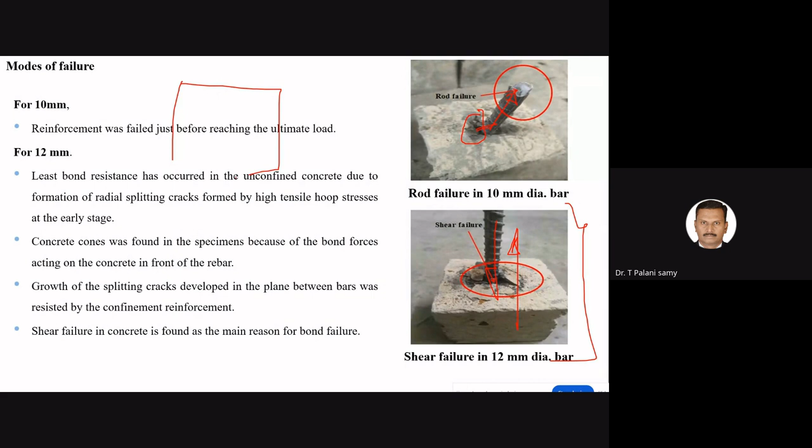Now we want to study in more detail how these failures happen - what is the bonding between the steel reinforcement and the matrix. For example, I can take one specimen as input, based on some researchers' work. This is the reinforcement steel, and around it we have the hydrated cement paste.

So what is the interface between these two? We want to study this interface more - that is the ITZ, the interfacial transition zone, between the steel reinforcement and the hydrated cement paste. We can take this and map it radially.

So we can find what compounds are present from the center of the reinforcement toward the other reinforcements. I can take a cross section to examine this interface, and look at the properties of the material here.

Similarly, I can go ahead and plot all these things to get a lot of information. For example, I can take SiO2, CH, and similar compounds, and plot them with respect to distance to see how they vary, and why this variation is happening. This is another kind of research.

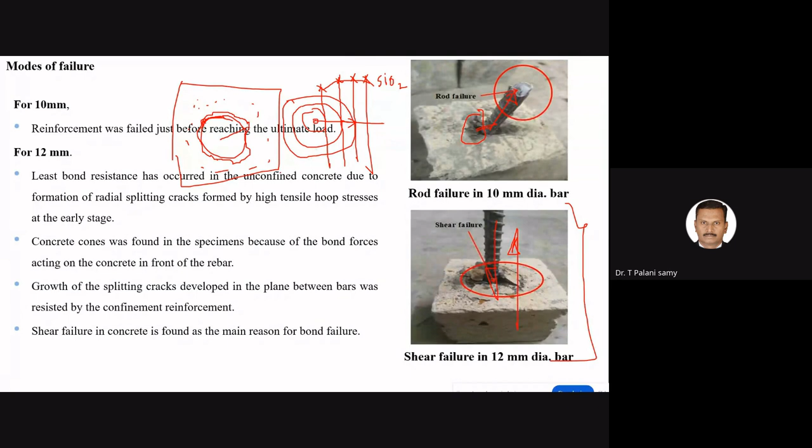With this information, we can conclude why the failure was happening - due to the bonding between the calcium silicate and the bonding between the cement matrix and reinforcement. We can learn this through detailed study, even looking at the microstructure level - SEM images of the section, element compounds, and XRD analysis give a lot of information.

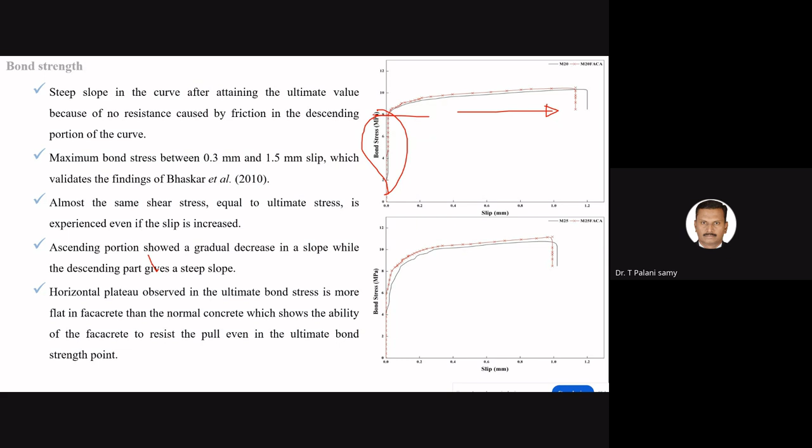The closely packed fine and coarse aggregate and thick gel form a better bond with reinforcement, shown here for 10 mm and 12 mm diameter bars - these are the bond strength variations. For example, plotting slip against bond stress shows how it varies: up to a point the bond and slip are closely related, then pulling out happens and there's more slip. For M20 with fine and coarse aggregate, the bond strength is around 8 Newton per mm square, which is good.

Up to this point the bonds are more or less equal. After that, small changes happen, then sudden failure happens. Around 1 mm slip it starts getting down, and here at 1.5 mm there's some small variation. This shows considerable improvement. This is 1.5, this is 1 - so this is good when compared to that. These kinds of studies are very useful.

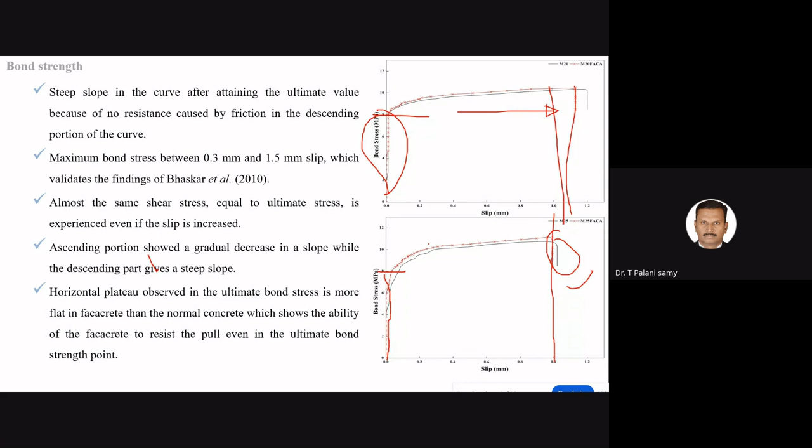This shows how the coarse aggregate is influencing the slip and bond behavior of the concrete systems.

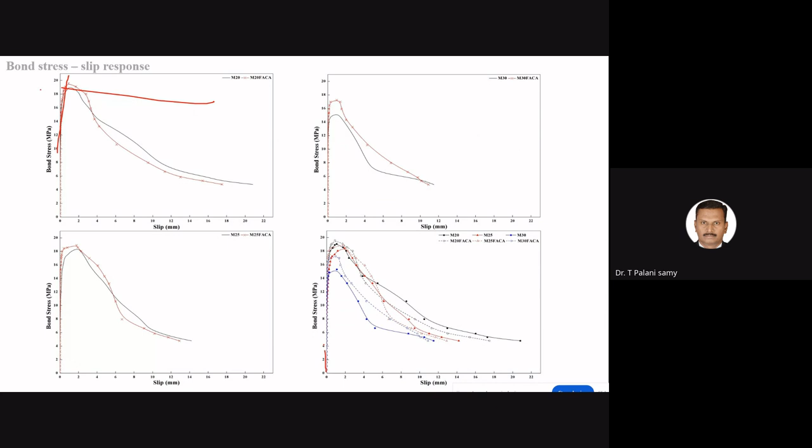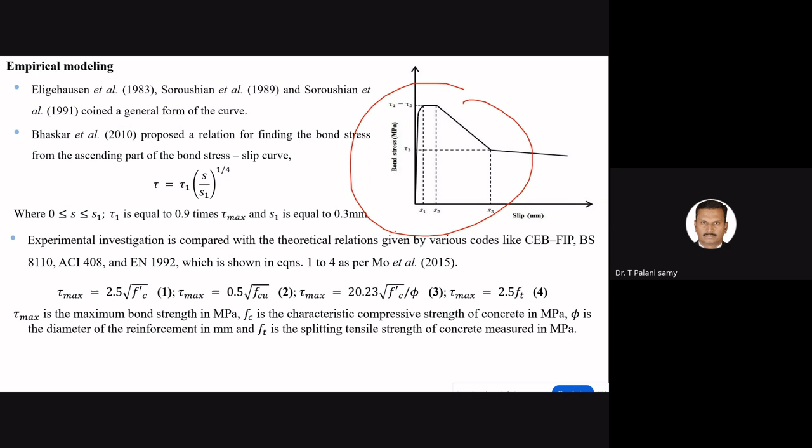So the basic idea here is we have the experimental data, then equivalently we can make a model like this, and we also tried this, for example equal kind of things. From this we can get analysis of what is S1, S2, S3, and develop the empirical model between the bond and the slip. These are the empirical modelings we did and compared with some codes also, so we can also develop this kind of thing.

Another one is behavior of concrete in RCC beams. You may ask questions - suppose I put this kind of aggregate in the beam, what will happen? For that we did some experiments in our laboratory.

The specimen size is around 1.7 meter length, depth is 150 mm, breadth is 100 mm. The reinforcement given is 2 numbers at that diameter at the top and 2 numbers at that diameter at the bottom - this is the reinforcement.

So here we measure the strain also, using S1, S2, S3, S4 pivot kind of things, and we can use the demec gauge to measure the strain. For example, apply the load and it tends to bend like this, not just bend but have some curvature. So there is a change in length, and by that origin we can get the strain. We measure that strain with respect to this fixed depth also, so we can plot the strain profile of our beam.

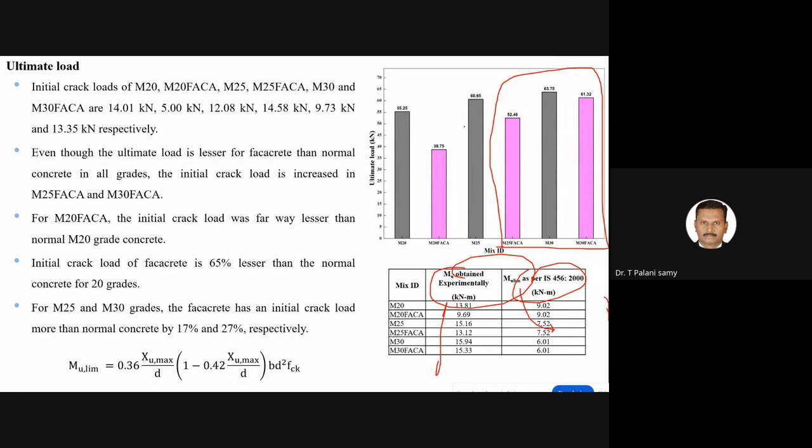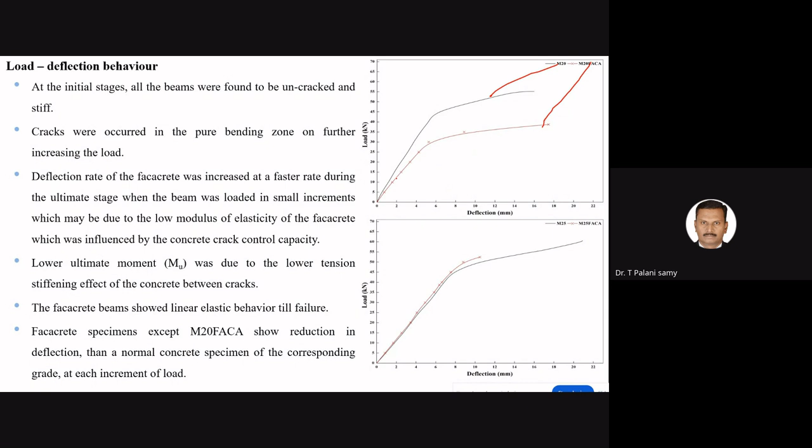These are the combined graphs. From this we can develop an equation also, an exponential equation, y equal to constant to the power of x, and x1 x2 kind of things. We develop our own equation also for different grades of concrete.

You can see some interesting part also is there, up to this one value here also. So these mixes are all showing very good results. So why kind of things we can go further into. You can get a lot of information. Even you can get around 22 mm deflection kind of things.

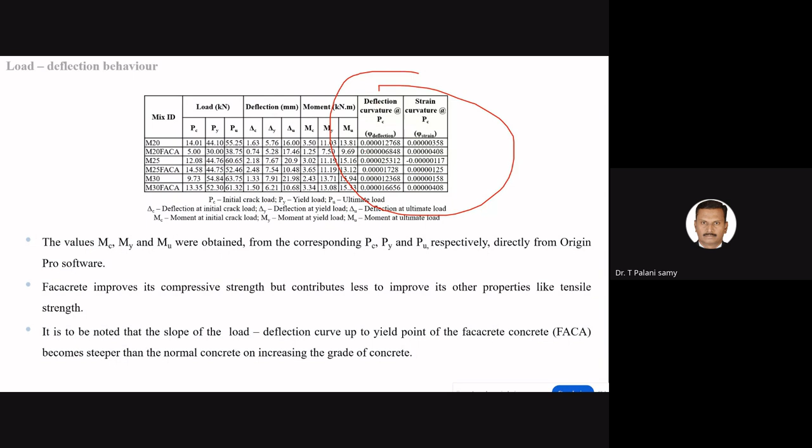From this we can find some other parameters like load deflection, moment, deflection curvature, strain curvature, and so on. Using this we can develop that model also, it's a possibility there.

Then another one is the ductility behavior. This is another area of things, so I will give the introduction only. Next part I will take again. This is the real part related to your topic.

How to develop that material, what is ductility, how to calculate ductility, and how ductility is very useful for earthquake resistant structural design, and how this kind of property we can use for structural design and all. I will elaborate in one more section, part 2.

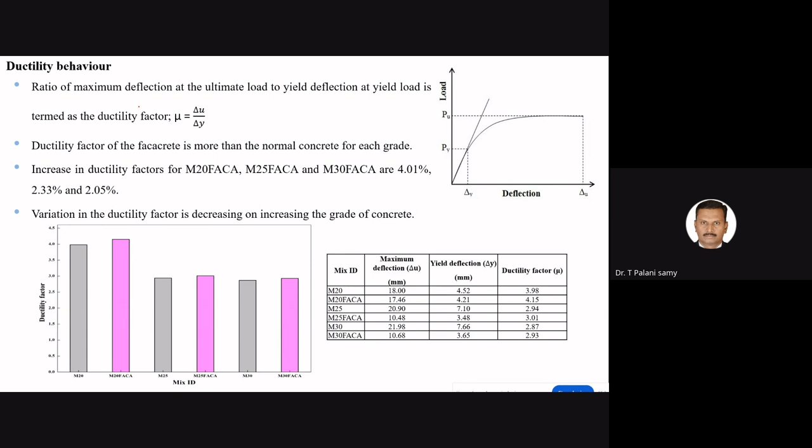Over to organizers. Hello. Anyone there? Hello, any questions or anything? Thank you, any specific question please? So I'm seeing the question paper, no question is there. So we can wind up the section now. I think all are muted, is that correct? Please organizer, please unmute it.